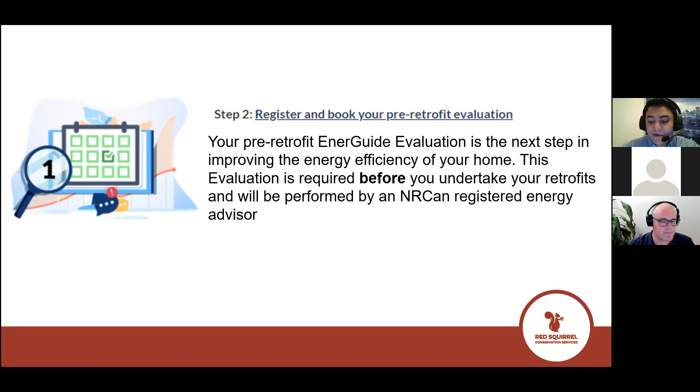The second step is booking your pre-retrofit evaluation. This is an evaluation that we as Red Squirrel Conservation Services can offer, with registered energy auditors trained and certified by NRCan, the federal governing body administering this program. So what is a pre-retrofit evaluation, commonly known as an energy audit?

It's an in-depth inspection of your home as it relates to energy consumption. We look at all of your insulation levels — attic, exterior walls, basement crawl spaces, windows, exterior doors, heating systems, cooling systems, hot water heating systems — as well as what's called a blower door test.

A blower door test effectively puts a large fan in your front door. This creates negative pressure that helps us identify any leaks and drafts throughout the house.

Addressing some of these leaks and drafts can be relatively inexpensive and have a really high impact on your heating bill. We can also put in our report a look at the potential of adding solar panels to your house to produce electricity.

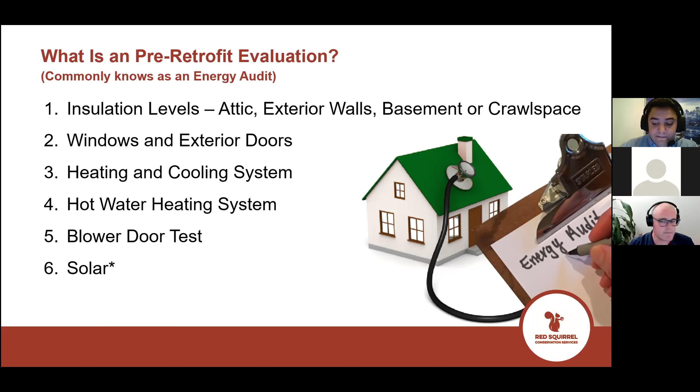Once we gather all that information, our auditors run it through a software called HOT 2000, made by Natural Resources Canada. This is very technical, advanced software where we enter all the values and measurements taken from your home, and we can run analyses to predict, for example, if we increase the attic insulation, how much energy you would save. We'll look into that a bit deeper once we dive into the report.

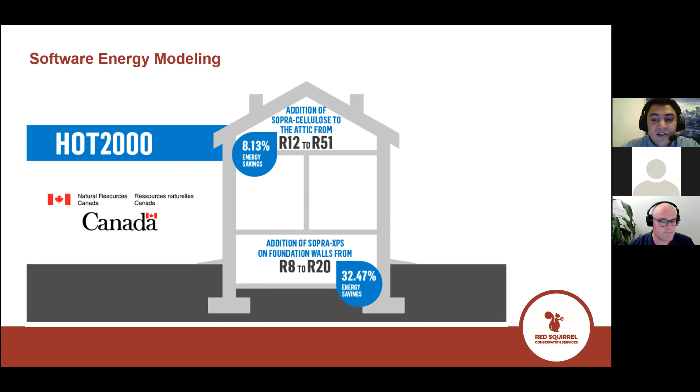Once all this modeling is completed, you get a number of documents, the first being the homeowner information sheet. Here's an example of a home, showing areas and the energy intensity — the amount of energy used divided by the area of the home. It uses the energy unit of gigajoules to calculate this, so we have one standard unit of measure whether it's natural gas, electricity, oil, or propane.

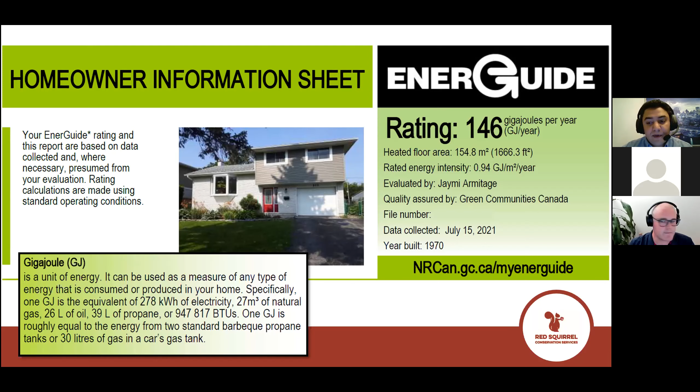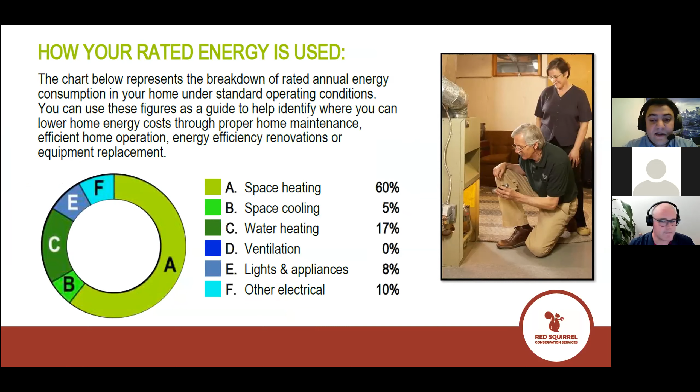From there, you will get basically how your energy is being used. Obviously, the most common in residential is space heating. As you can see here, it's clearly over 60% of the energy usage of the home is associated with space heating, and then at second place is water heating. So producing heat is very energy intensive, and we can really see that breakdown throughout the home.

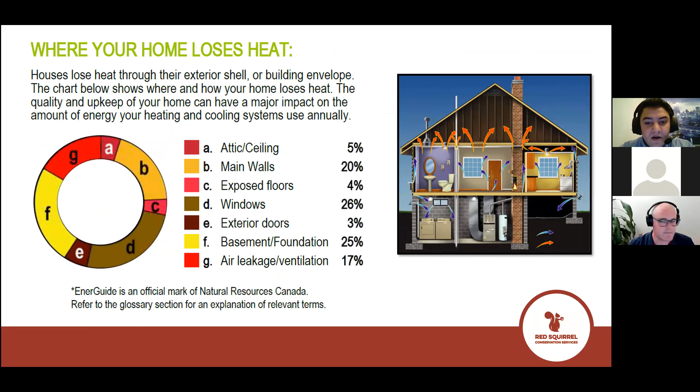What ties to that is where the heat is escaping. Hopefully you've heard the term heat loss. This will really break down where that heat loss is occurring and where our heat is escaping, whether it's through our attics, our walls, our windows, our basements, and air leakage, which we can discover with that blower door test. So you will get this full breakdown of seeing where all of this leakage and heat loss is happening.

Then basically what we will get is the actual modeled consumption. Just to be clear, this is not taken from your utility bills; it's based on the measurements that we've taken of your home. To translate that into dollars, I've used what's called a blended rate. The complexity with both natural gas and electricity is that these rates are constantly changing, depending on where you live, the time of year, and many other factors. So this is very much an average, a blended rate that sums up all the different charges, giving us a rough estimate for converting that into dollars.

In this case, this home uses roughly $1,200 a year in natural gas and $1,500 a year in electricity.

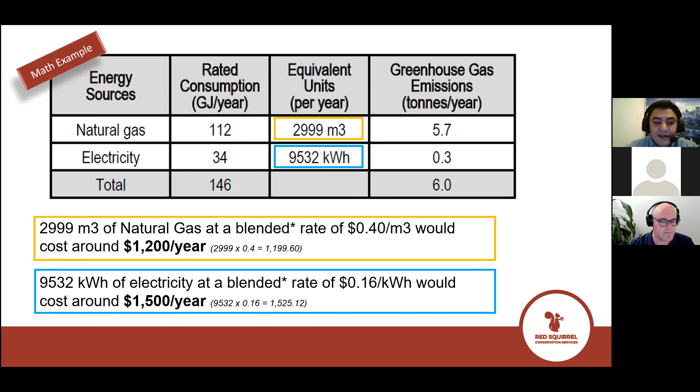So once that's the homeowner information sheet, the next document you get is the renovation upgrade report. In this report, you get what's called the EnerGuide energy rating. This particular house, built in 1970 in Kingston, had a rating of 146. I would say this is actually an ideal scenario because this type of home would have a lot of potential in terms of how to improve.

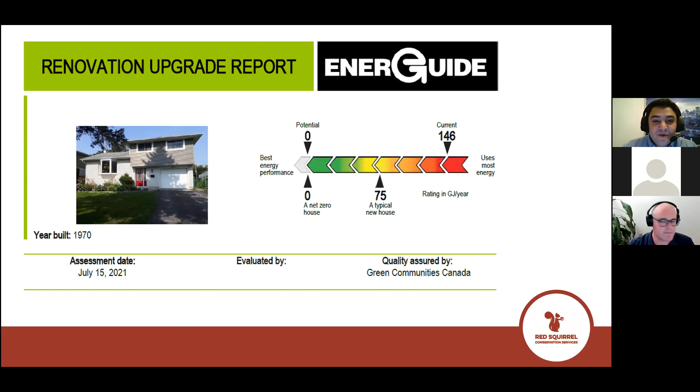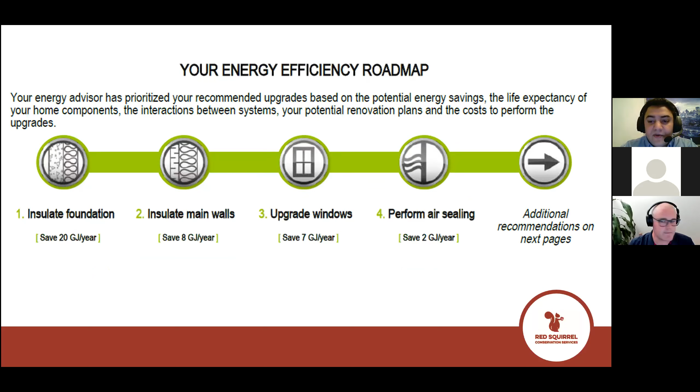The most important part of the recommendation report is where the auditor, based on their assessment, will provide recommendations on what items can be upgraded, and indications of how much energy they would save. In this case, insulating the foundation is number one, saving 20 gigajoules per year, and so forth with insulating the main walls, upgrading the windows, and performing air sealing.

We want to be able to calculate how much this is going to save, and how much we're going to get in incentives through this program. It says this upgrade could reduce energy consumption by 20 gigajoules per year. We can do a little bit of math, which comes up to $216 per year in natural gas savings. Now, homeowners using oil or propane will see greater numbers because oil and propane are more expensive than natural gas for heating.

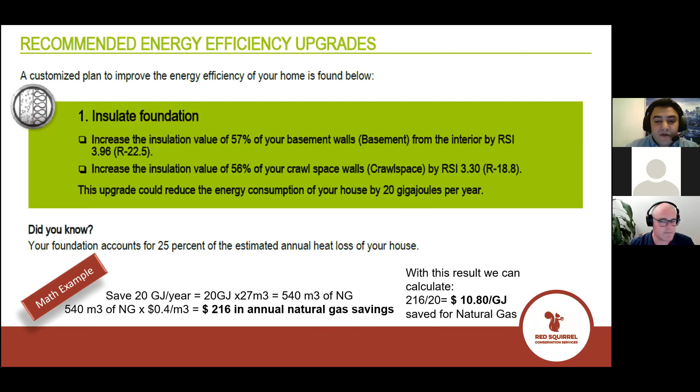From there, I've basically broken down a savings per gigajoule, which is then applied for the later examples. Now, how much money will I get from the grant? Unfortunately, that's not how the program is set up—it's not just a blank check of $5,000 to do whatever you'd like. The way the incentives are measured is based on the improvement from having the first audit, getting your improvements done, and then having a follow-up audit afterwards.

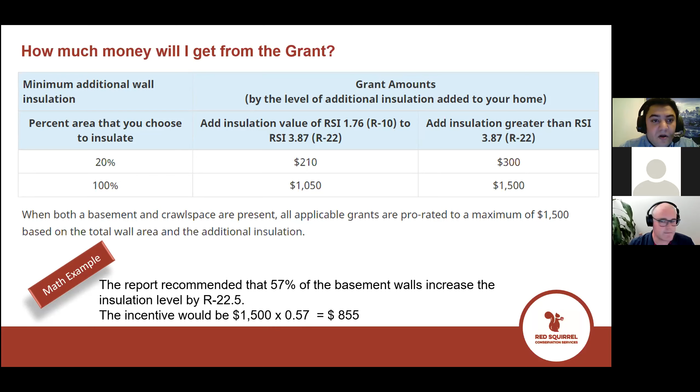In this case, where the audit recommended that 57% of basement walls be increased by R22.5, we can do the math: the chart shows that by adding insulation greater than R22 to 100% of our walls, we would get $1,500 in grants. However, since we're only doing 57% of our walls, that value is prorated—1,500 multiplied by 57% equals an $855 grant for that basement wall insulation. Now, there are a couple different ways to do this.

This one is just showing how you can insulate it from the interior, depending on your conditions, whether you have any moisture issues.

It could also be highly recommended to insulate it from the exterior, which would involve excavating all the earth around your home, insulating it from the outside. But again, we always recommend leaning on the expertise of a contractor for the specifics on your home when it comes to implementing any of these solutions. Here are a few images of different ways it can be insulated from the interior using different products or even a combination of products.

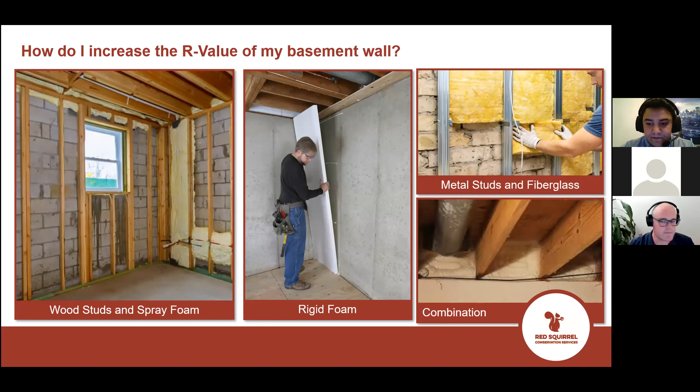So what's the next step? We've completed our pre-retrofit evaluation, that is the first initial audit. We've received our recommendation report, which we've gone over, and we now need to choose what retrofits we want to implement. From there, we call our contractors, get our quotes, compare our quotes, and select our preferred contractor. It's very important to have multiple opinions, get multiple quotes, and don't just go to one single contractor. Once you've selected them, you get the work done.

Once all of the work is complete, we need to do a second, what's called a post-retrofit evaluation. This is the important piece because we need to be able to document, measure, and report on the improvements from the pre-retrofit evaluation. In the post-audit, we will measure and capture the documentation related to the completed retrofits, and that's when we submit all of these documents to the Federal Greener Homes portal.

And of course, last of all, you receive your reimbursement. Just to be clear, this entire program is on a reimbursement model. So all costs, including the cost of the audit and including the costs for your contractors and your upgrades and materials, need to be paid up front, and then the program will reimburse you at the end.

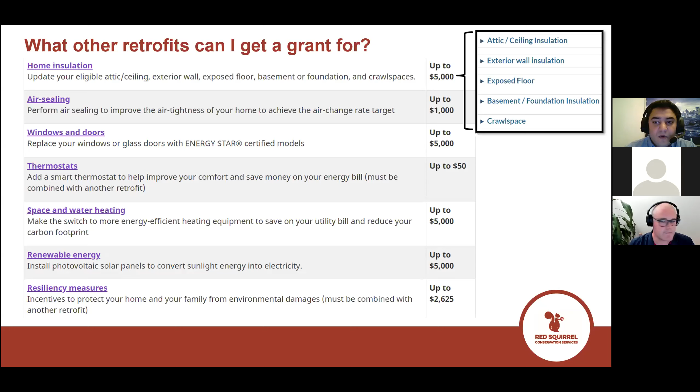I'm going to go through these quickly, just to show how some of these other grants are calculated. When it comes to air sealing, it's all about a target that is set when we do our initial measurement of the house. The grant is based on whether you meet your target or exceed it. By meeting your target in the RUR, the renovation upgrade report, you get $550. For reaching 10% higher than your target, you get $810. And for reaching 20% better than your target, you would receive $1,000.

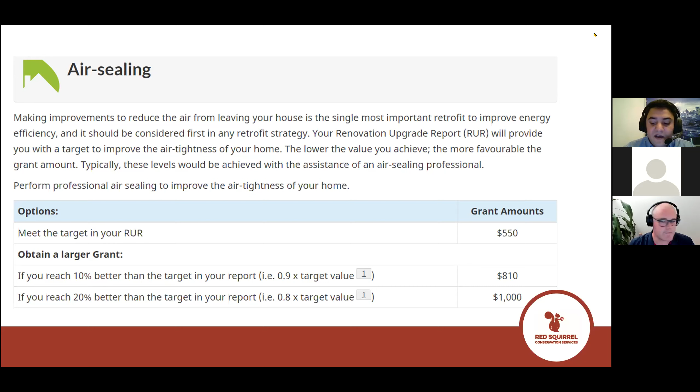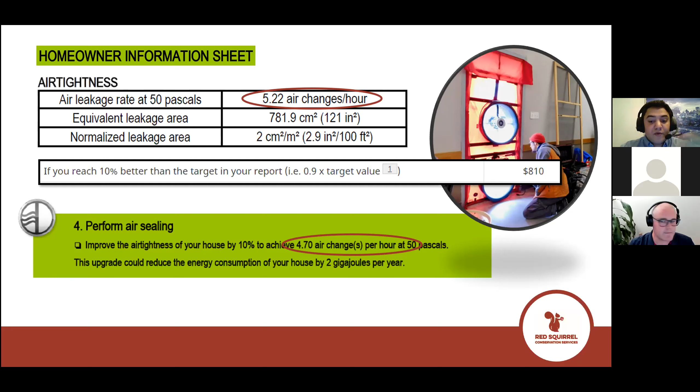Let's look at what that would look like in the case of this home, and the image on the right is a blower door in action. The air exchanges per hour, the amount of air that would circulate throughout the house within an hour, was measured at 5.2 currently. If you reach 10% better than your target report and bring that number down to 4.7 air changes per hour, you would receive a grant of $810 to do that. How to achieve this can be a variety of things: spray foam around dryer vents, basically any openings you have to the exterior, putting caulking around windows, or even when you replace your windows and get better seals around those windows. There are numerous little things that can be done to achieve this.

Windows and doors. There's basically two tiers when it comes to windows and doors, and I will say, just from customers that I've spoken to, this is definitely a very popular retrofit that a lot of people end up going for. Obviously it's good getting new windows, increasing the value of the home. But when it comes to the grant, it's really based on the energy rating of that window. The most common tier at $125 per window is basically an Energy Star certified model with an energy rating of greater than 34.

One thing I encourage all clients, specifically when looking for windows, make sure you ask your contractor or supplier to confirm that the windows they're quoting you are on the eligible list, which can be found through the website. I'll provide links to this website at the end of this presentation.

The next tier at $250 per window is what they call the Energy Star most efficient model, with an energy rating greater than 40, typically your triple pane, high-end windows. At that point it's really about looking at the dollars and economics to see which one works best. Similarly for doors, there's only one category, which would be $125 per door.

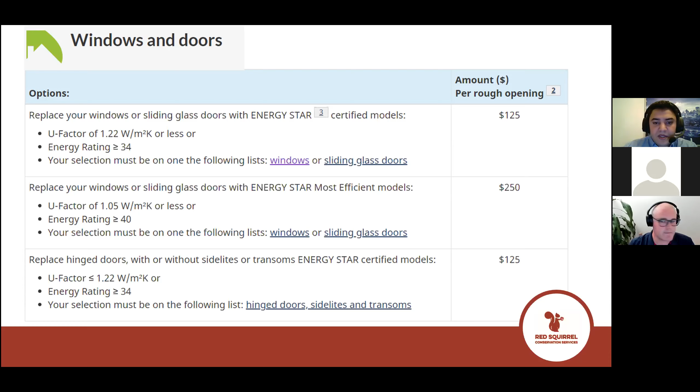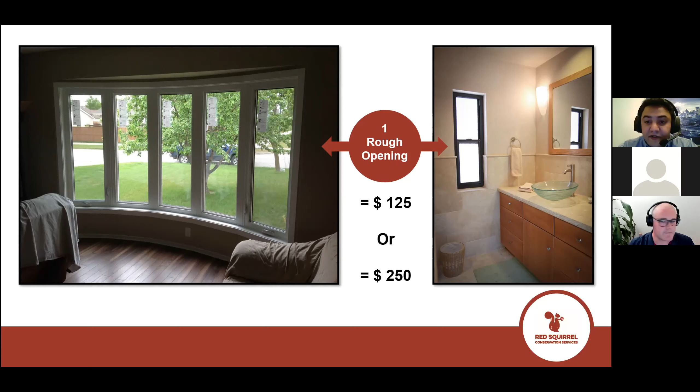One thing I want to mention about windows is if you look at the top of this column over the dollar amounts, it says amount per rough opening, not amount per window. This means the actual hole in the wall, not the number of windows that make it up. So in this picture, this large bay window is comprised of 5 individual windows but unfortunately only counts as one rough opening, so it's only eligible for the grant of either $125 or $250 depending on the energy efficiency. Contrary to that, even a small bathroom window also counts as one rough opening, and you're also entitled to the same $125 or $250 for that rough opening.

Going back to the report for the home we're using as an example, the auditor in her recommendation report recommended that 10 windows be replaced with Energy Star certified models. In this case it's pretty straightforward: we take our 10 windows, multiply by $125, totaling $1,250 in grants for the window portion. The way this grant works is, again, up to $5,000, and you want to add as many of these little pieces as you can to try to get up to that $5,000.

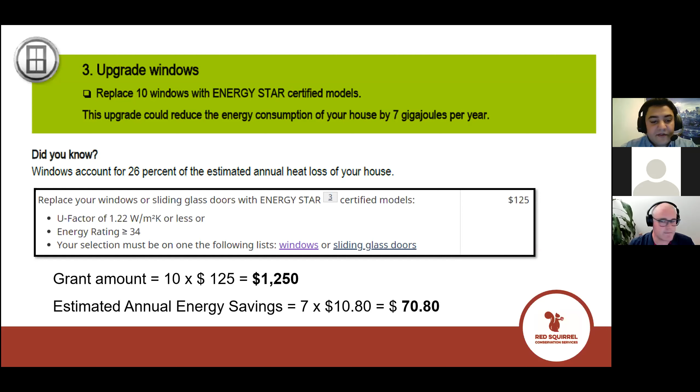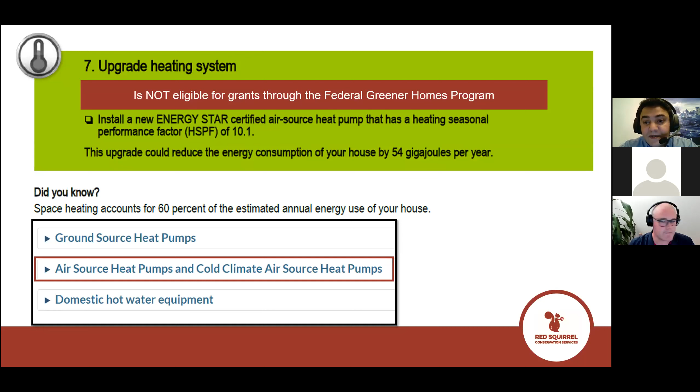The only thing they do cover are the Energy Star certified air source heat pumps. There are other programs for natural gas customers through the Enbridge program, which I will touch on briefly at the end of the presentation.

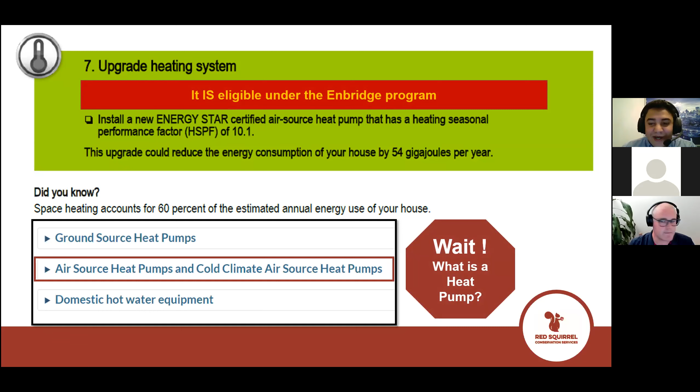I get the question all the time: what is a heat pump? I'll quickly spend a few minutes describing its operation. Basically, a heat pump is essentially an air conditioner that can work in reverse. You typically have a unit outside that can either tie into your existing furnace, whether oil, propane, or natural gas, or it can be standalone through a ductless system, often referred to as mini splits. They use electricity to create heating or cooling, working very similar to an air conditioner, with the added component of being able to work in reverse. This is heavily incentivized under the Greener Homes program and a great alternative, specifically when converting away from oil, propane, and natural gas for heating.

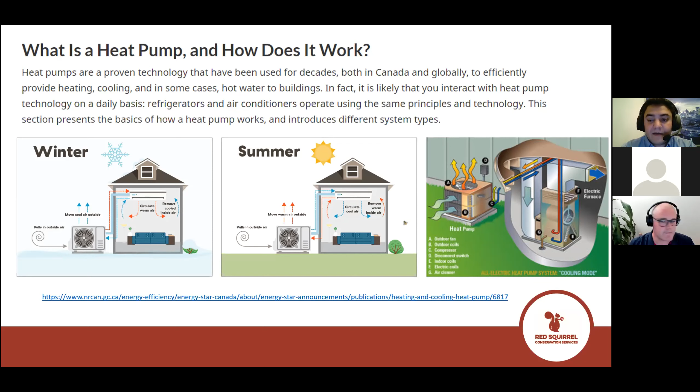The way the grants work, there are basically 3 tiers when it comes to heat pumps. The lowest tier at $2,500 is typically for very small systems with 2 indoor ductless heads, so this is typically for a smaller home. Again, similar to the windows, the quoted equipment must be on the eligible list.

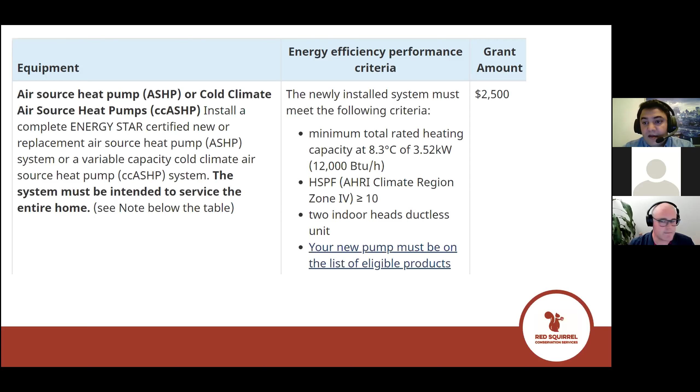The next tier up, probably the most common, is our typical air source heat pump, which can be a central ducted system or have 3 interior mini split heads, basically cassettes that mount on the wall and don't tie into ductwork. If you have a home heated with baseboards and no ductwork, it can be very expensive to install ductwork, so sometimes the 3 indoor heads or ductless units are probably the best answer. We definitely recommend going through an HVAC contractor to look at what the best solution is for you.

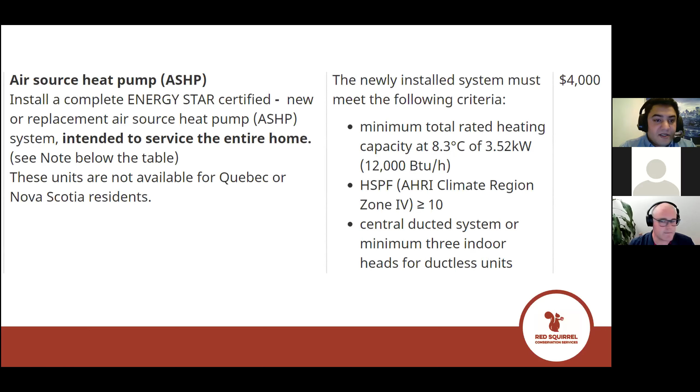The reality is there's a lot of complexity when it comes to heat pumps and heating systems in general, so going back to that point of getting multiple opinions and multiple quotes is always a strong benefit. This $4,000 grant is for basically the generic heat pumps that are sized for your entire home.

The next tier up is a full $5,000 incentive, and these are for cold climate heat pumps, developed specifically for our colder climates, which can still provide heating at minus 30 degrees Celsius. Whereas the more traditional heat pumps, when it gets to about minus 10 or minus 15 degrees Celsius outside, sometimes struggle to provide heat. At that point you'd need a secondary heating source, which is either baseboards, a furnace, a boiler, or even an electric furnace in some cases.

Whereas the cold climate heat pump still requires a backup system just in case, because we sometimes get temperatures beyond -30, and you want to make sure you have a system that can cover the load, your heat load, throughout the winter.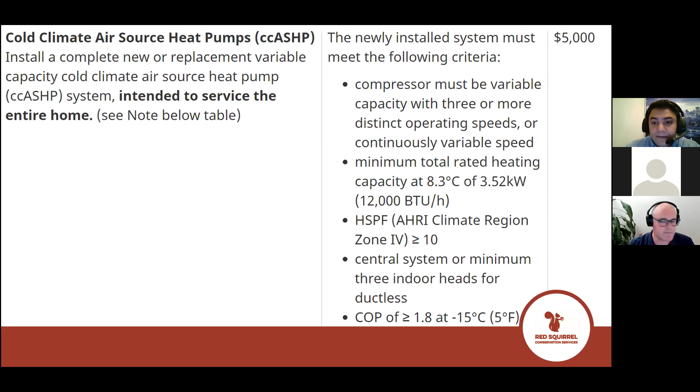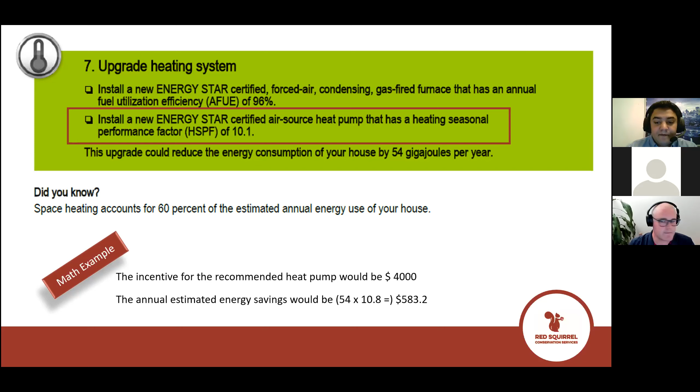So when we're looking at our grant in this case, the recommendation was to install an air source heat pump, the more typical heat pump, which would qualify for $4,000 of incentives. Again, space heating accounts for 60% of the estimated annual energy use of the home, and we have the cost savings there as well.

Installing solar panels - basically the way the incentive works is you get $1,000 per kilowatt installed. Now, what is a kilowatt in terms of capacity, and what does that mean? How big is the system that I need to get for my home? That is basically what we need to figure out.

Part of that process, specifically when it comes to adding solar panels, is what's called a solar ready assessment. This assessment is done by a solar installer in the area, not by us, so we'd recommend you go through a solar contractor to provide a document which lists the roof angles of your home and the total PV capacity - in this case 11.5 kilowatts - that could fit on the roof. It also shows all the directions and whether the roof has sufficient structural support to support the system, as well as the LDC capacity.

LDC stands for local distribution company, so that would be Hydro One - whether Hydro One would allow you to connect your solar panels to the grid or not. In this case, for this client, the local distribution company, Hydro One, has approved them to put solar on their roof.

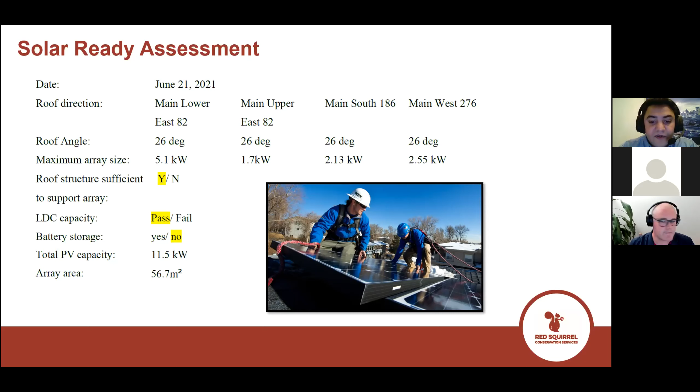Going back to our recommendation report, they recommended an 11.5 kilowatt system be installed at $1,000 per kilowatt. This would actually turn out being $11,500, but unfortunately the incentive is capped at $5,000, so just installing this solar system at that capacity would maximize the grant available. We also calculated the energy savings from that system.

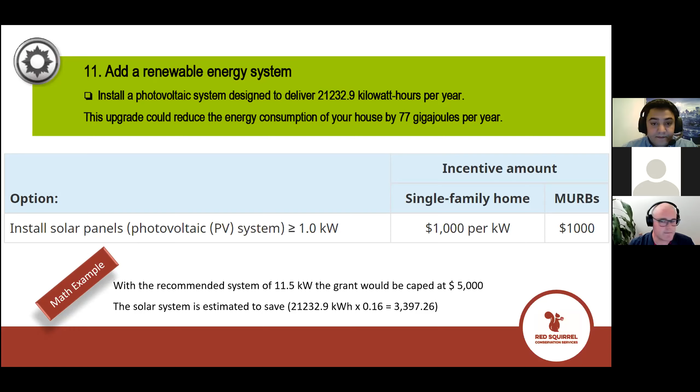Some other potential upgrades: attic insulation is a very common one. We in the industry call it the low-hanging fruit because it's typically relatively low cost, specifically compared to adding basement insulation where you need to excavate the exterior, or changing your heating system, or adding solar panels. Generally, adding some insulation in your attic is one of the lower cost items.

And it has a pretty decent incentive. The way these incentives work, it's all based on your starting point, and then once you improve it, what your ending point is and how much you've improved it by. So for example, if your current insulation level in your attic is R12 or less, and you bring that up to R50, you'd receive a grant of $1,800. If you already have a decent amount of insulation, say between R12 and R25, and brought that up to R50, the incentive would drop to $600.

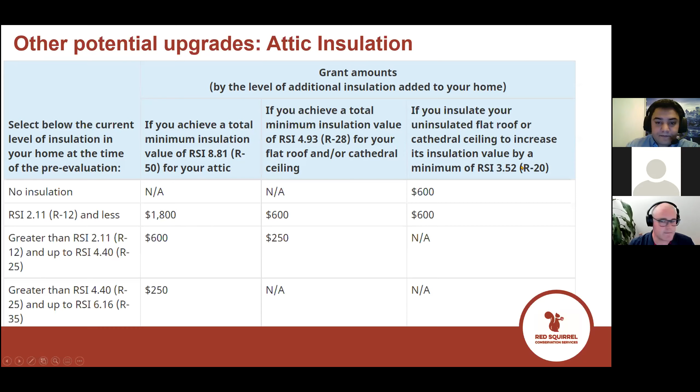There are different products and different contractors for adding that insulation, so again we encourage you to reach out to different contractors, get different opinions, and do a bit of research. Our auditors are there to answer your questions and can definitely provide advice on what type of insulation is best for your particular application.

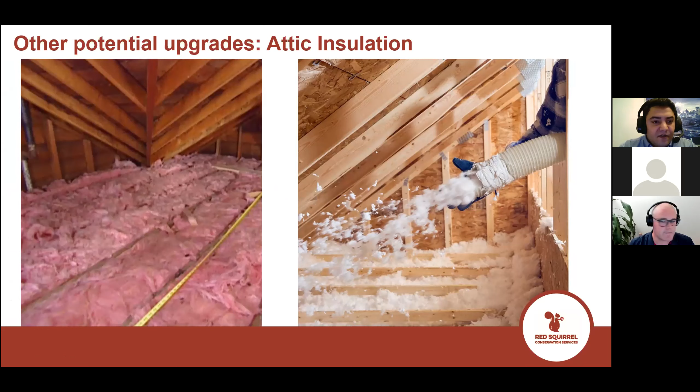The other component, as we saw from the homeowner information report, was that hot water was the #2 most energy consuming item in your home. A lot of people don't know about this, but you can actually get heat pumps that are built into a hot water heater. You can see an image here on the left.

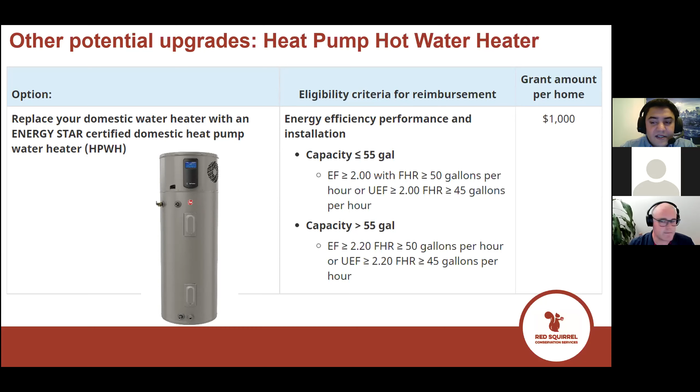It basically looks like a regular hot water tank. You connect your water pipes to it, as well as electricity, and it uses the electricity to heat up your water for showers and washing your hands. This is about 3 times as efficient as a typical electric hot water heater because it uses that heat pump technology. If you purchase one of these systems, you are eligible for a $1,000 grant.

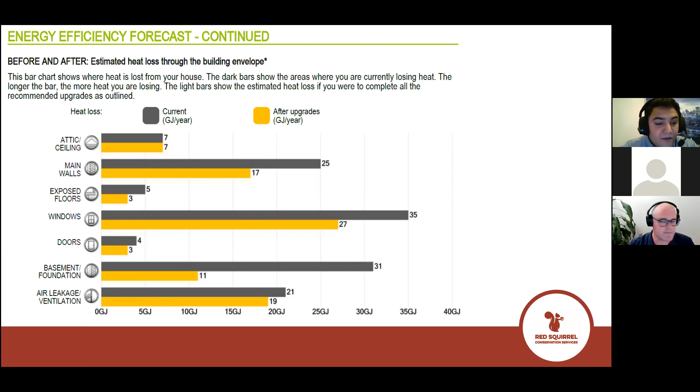So just to summarize, I went through a few examples, but this is what you would get in your recommendation report, showing in gray the current consumption for these various areas, and then after you do the upgrades, what the reductions will be. We can clearly see the massive reduction when it comes to the basement foundation, as in this particular case they are losing quite a bit of heat through it, but there are also significant savings to be had around the main walls as well as the windows.

Very similar here, this is the actual consumption in gigajoules within the categories: space heating, space cooling, water heating, obviously with a big focus being on space heating. This is implementing all of the upgrades that were listed. Now, you necessarily don't have to implement all the upgrades. Again, these are just recommendations, and it's up to you to choose, and we'd be happy to help and provide explanations for all of these items, and then it's up to you to decide which ones you'd like to move forward with in terms of implementing.

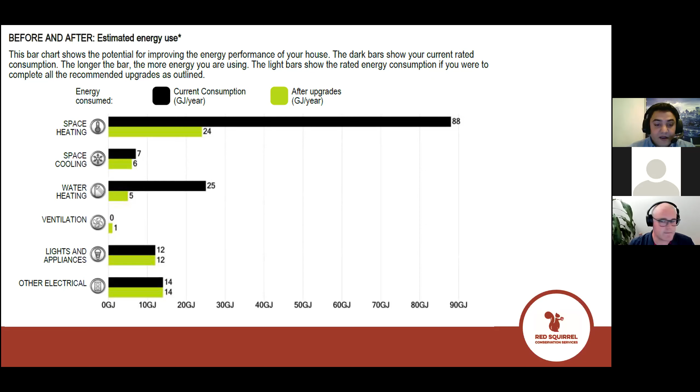Just before I wrap up, this entire presentation up until now has been with regards to the Greener Homes program. However, for Enbridge customers, so those who do have natural gas, there is an additional program provided by Enbridge. The main difference is they provide incentives to install new natural gas equipment, such as a natural gas water heater, which also includes instantaneous hot water heaters using natural gas, as well as natural gas furnaces and natural gas boilers.

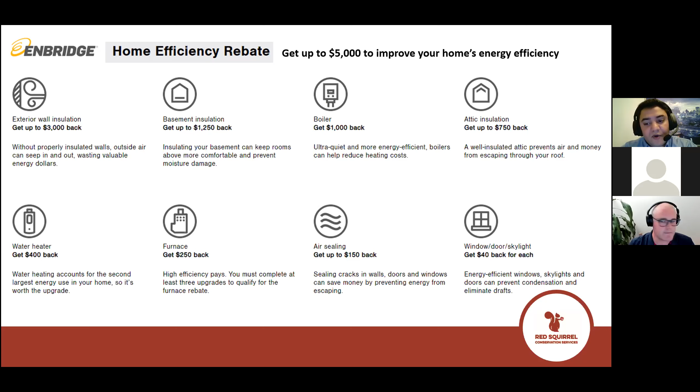They do cover some of the other things that are the same as in Greener Homes, such as windows, insulation, and air sealing. But I will say generally the Enbridge program is significantly less generous when it comes to these things. One example is the windows, where you can clearly see that you'd only get $40 back for each window, whereas through the federal program you can get up to $125 to $250 per window.

So last thing is just going over our prices. There are 2 audits required for this program. One is the pre-retrofit evaluation at $450 plus HST, done before any work is started. And then after your work is completed, we come back and do the post-retrofit evaluation at $200 plus HST. So that comes out to a total price of $650 plus HST, and you will receive a $600 reimbursement for that. So all you end up paying out of pocket is $50 plus the HST.

Depending on where you live, there may be some travel fees associated with it, but generally Amherstview and Odessa, there is no charge. But if you are a bit outside of that, there is a travel fee that may apply. All right, any questions? I think I did that within time.

Thank you, Cedric. I did see a question come in, actually, if you don't mind. Do you know if people can stack the Canada Greener Homes program and the Enbridge program? If you could speak to that, and I'm going to keep on monitoring everything else. Thanks again, that was a very good presentation. But yeah, please, do you have any idea on that?

Absolutely, that is a great question, and the answer is yes. However, you have to be cautious because you can't basically double dip for the same item. So the only time people or customers are applying to both programs is, say, if they're replacing a furnace and maybe a hot water heater with a natural gas furnace and a natural gas hot water heater, and then doing other items such as windows or insulation levels under the Greener Homes program. The other thing with the Enbridge program is there is a minimum amount of upgrade measures you have to complete to qualify, which is a minimum of 2, not including a furnace.